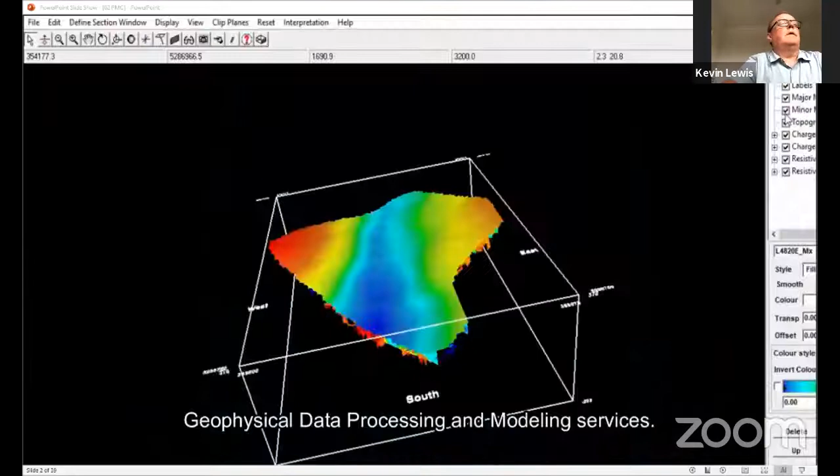Provide a wide range of geophysical and geotechnical services to environmental groundwater and engineering industries. Long-term experience in base metal exploration, porphyry gold, and copper exploration, geophysical data processing, and modeling services.

We have a wealth of international survey experience over the past 2 decades, across over 28 countries in some of the most remote and challenging environments.

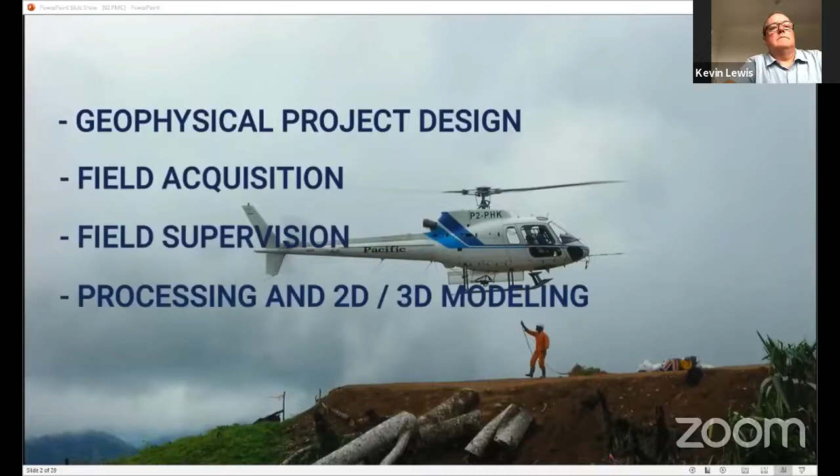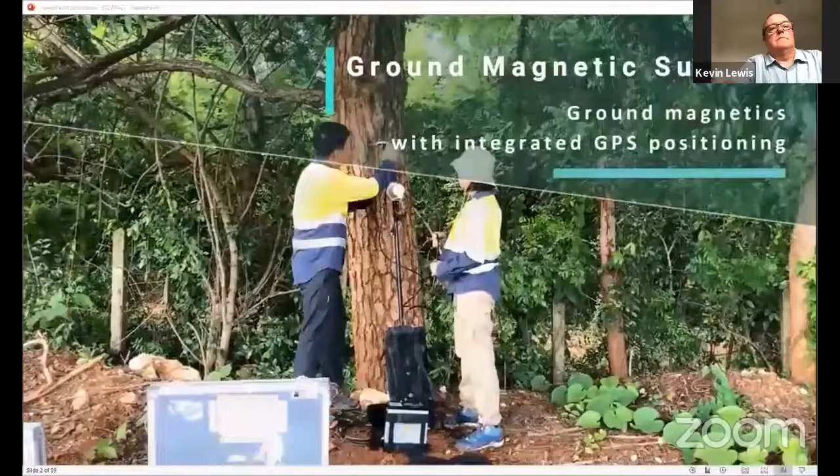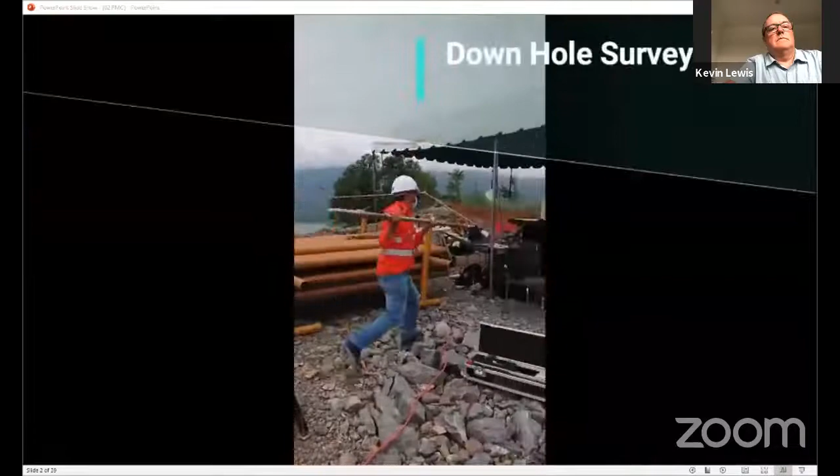Our services: geophysical project design, field acquisition, field supervision, processing and modeling, data interpretation, induced polarization surveys, transient electromagnetic surveys, ground magnetic surveys, unmanned aerial vehicle magnetic service, downhole surveys, radiometric surveys, resistivity surveys, seismic surveys.

Atty Geophysical Consultants.

The Philippine Mining Club and the Philippine Infrastructure and Construction Club are professional networking forums bringing industries together and creating opportunities for the Philippine mining and infrastructure and construction industries.

Networking is about giving, not taking. It is about forming trust and helping one another toward mutual goals, regularly engaging with your contacts, and finding opportunities to strengthen relationships.

Networking is a great opportunity to exchange best practice knowledge, learn about the business techniques of your peers, and stay abreast of the latest industry developments.

Opportunities like partnerships, invitations to events, introductions, and giving talks and presentations bring challenges that benefit and feed your career, professional development, and personal interests.

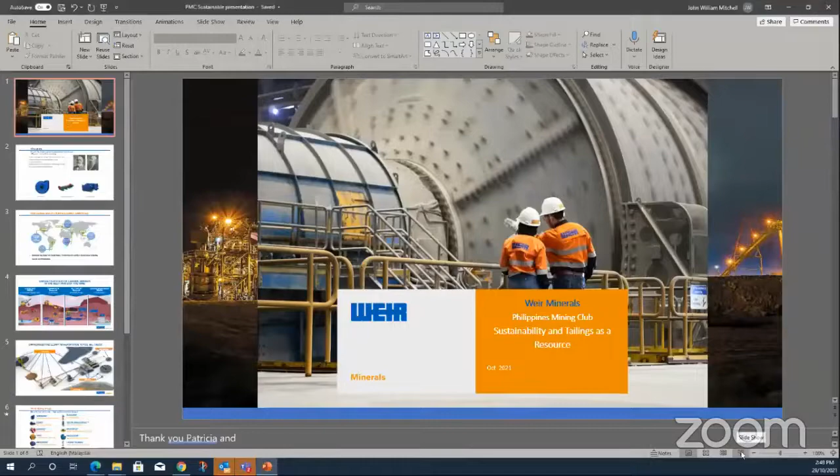So it's a great pleasure to be able to talk today to the Philippine Mining Club, and we'd like to thank you for this opportunity. Hopefully in 2022, we'll be able to do a bit more face-to-face when we get back to the new normal.

But today we're going to do just a very brief overview of Weir's vision of sustainability, and a little bit of explanation about Weir for those who are not 100% familiar with Weir. Then we'll move on to Nils' presentation. I will only take up about 10 or 12 minutes.

So who's Weir? I've been to many mining club luncheons around Asia, and as soon as they see Weir Minerals, sometimes people say, which mines do you operate in? Well, we like to say we operate in all of them.

So we have a division in minerals that focuses on mineral processing for engineering products, services and solutions. The two old chaps you see in the picture here are George and James Weir, who started the company 150 years ago to this year. We've actually been having celebratory functions this year, which has involved some of the royalty in the UK.

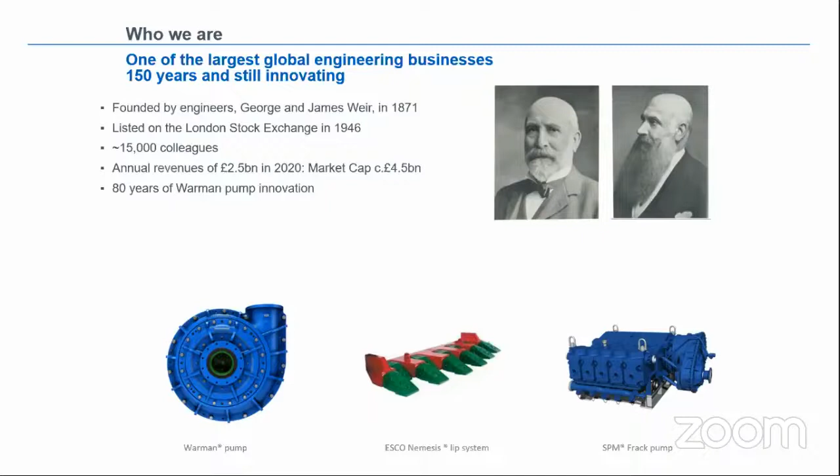So Weir is quite a global manufacturing and supply chain business. We have 15,000 staff spread right the way across the world. This enables us to get geographically close to our customers to provide that after-sales service. It also has been great, especially during this COVID time, giving us a great degree of supply chain flexibility.

In Asia, we operate out of our regional headquarters in Kuala Lumpur. And in the Philippines, we have a fairly large staff, led by Nico Satya, which includes our area support staff, our rebuild and our rubber lining teams.

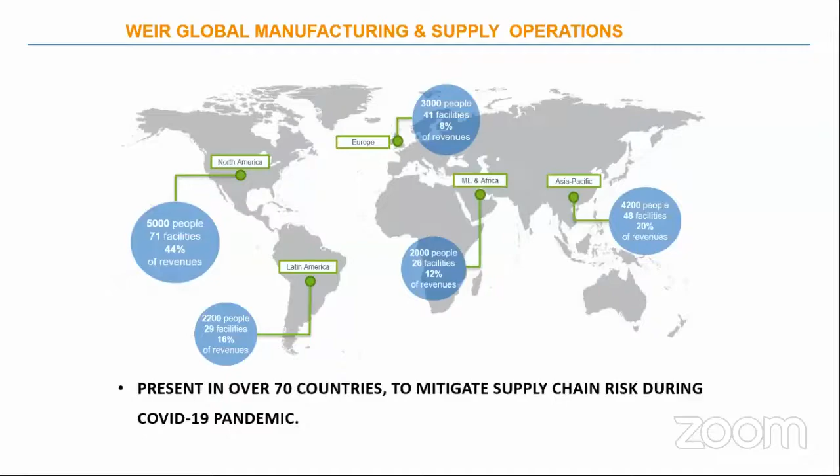So the Weir portfolio of products, with the acquisition of ESCO, gave us more of a footprint on the pure mining side of the business, where they are the #1 ground engaging tool manufacturer in the world. With comminution, our Enduron high pressure grinding rolls are #1 in the world.

The Warman slurry pump is by far the #1 used slurry pump globally. And of course, in tailings management, which Nils will be talking more about, we have our GEHO positive displacement pumps for pumping high density solids, concentrated slurry.

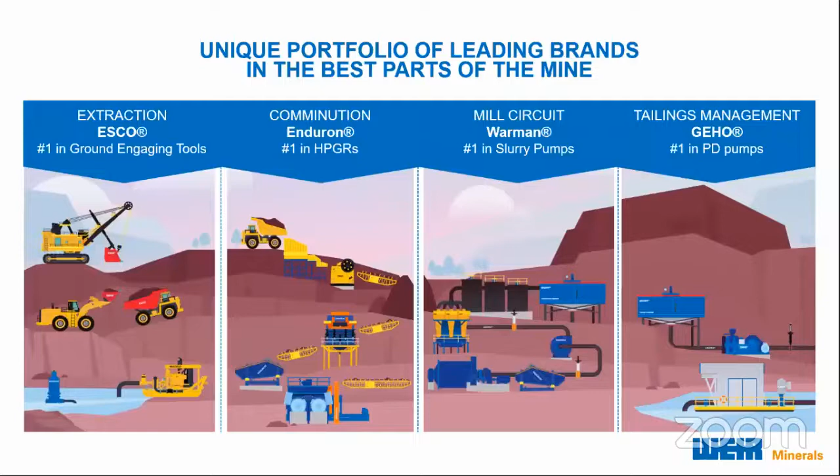This gives Weir an end-to-end solution for mineral processing plants, right from truck body linings through to tailings systems. With all the different technologies, we have a wide range of erosion and abrasion resistant materials that have been developed for each product. We're able to apply those to our existing customers for the benefit of alleviating pain points and wear points within their plant, not just purely within our pump, hydrocyclone or crusher products. So we're doing a lot more with piping and drop chutes, etc.

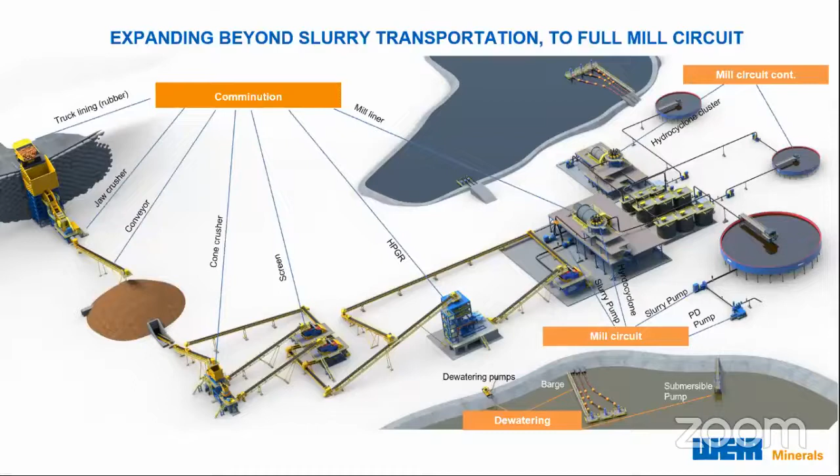Some of the brands under the Weir company portfolio will be very obvious and known to you, familiar brands like Linatex and Multiflo, and then a few other brands you may not have been familiar with in the past.

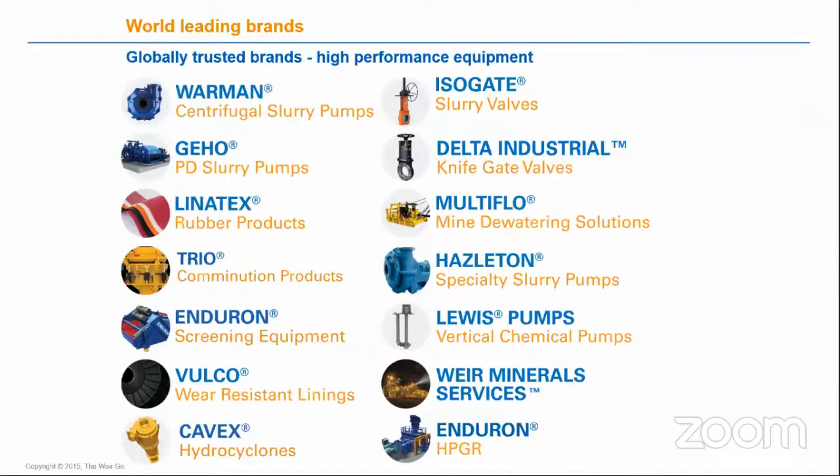So Weir's vision for sustainability - it's an opportune moment with the COP26 conference about to kick off in Glasgow, which is the home of Weir. In fact, we had a webinar last night from our CEO and the board, and sustainability is at the core of our business. There was a comment made recently by the US Special Envoy on the Environment, John Kerry, where he mentioned that governments can't do it alone, that private companies also have to get involved and contribute to sustainability.

So to sum it up, we strive to make our customers more sustainable and efficient, and of course sustainability and efficiency can also improve profitability. It's at the core of our purpose and the heart of what we do. At this point, I'd like Joe Paul to run a short video on our Weir vision for sustainability, which would be a better summary than anything else I could say.

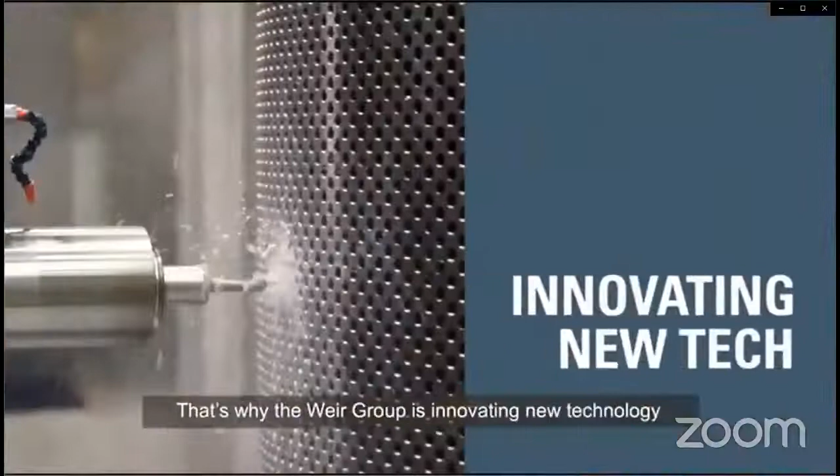Sustainability is a big challenge for all of us, and the world's primary industries need to be part of the solution. That's why the Weir Group is innovating new technology to enable the sustainable and efficient delivery of the natural resources essential to creating a better future for the world. Because many natural resources are finite, it's critical that we focus our innovation on helping our customers become more sustainable. We are engineering this transformation in the industries we work in.

Reducing the world's dependence on carbon requires more electrification and greater use of alternative energy supplies to power our vehicles, heat our homes, and reduce greenhouse gas emissions. Yet renewable technology usually requires metals, which are a non-renewable resource. That's why innovative technology is so important to this solution.

An electric vehicle uses four times as much copper as a traditional car, and Weir Group's technology helps process most of the world's copper. So you can see why a focus on making technology more efficient is critical in making mining more sustainable. We want to provide solutions to our customers that meaningfully reduce water and energy use and minimize waste.

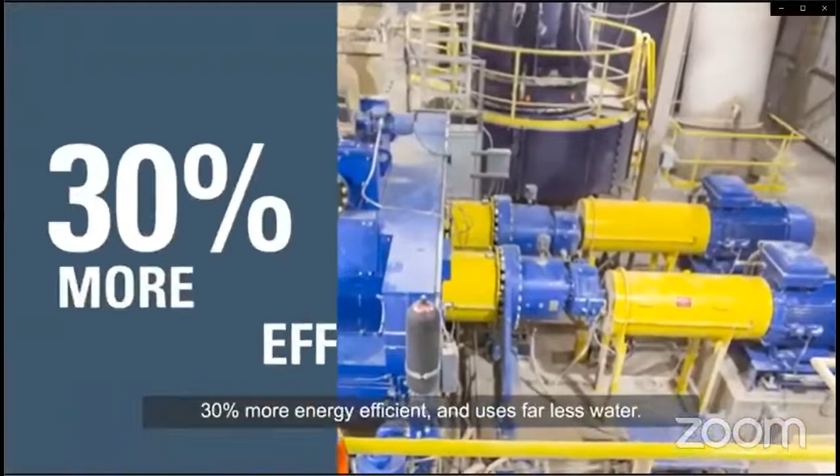Weir Group's Enduron high-pressure grinding roll is 30% more energy efficient and uses far less water. Our new TerraFlowing technology can turn tailings waste into a safer, usable resource. We're even working on solutions which will reduce truck journeys in mining by pumping ore from deep underground.

We strive to make our customers more sustainable. It's core to our purpose and at the heart of what we do. But to be credible, we have to make Weir more sustainable, and that's why we've signed up to a 50% reduction in our own CO2 emissions by 2030. And of course, sustainability is not just about the environment - it's about having a positive contribution in the communities and to other stakeholders all over the world.

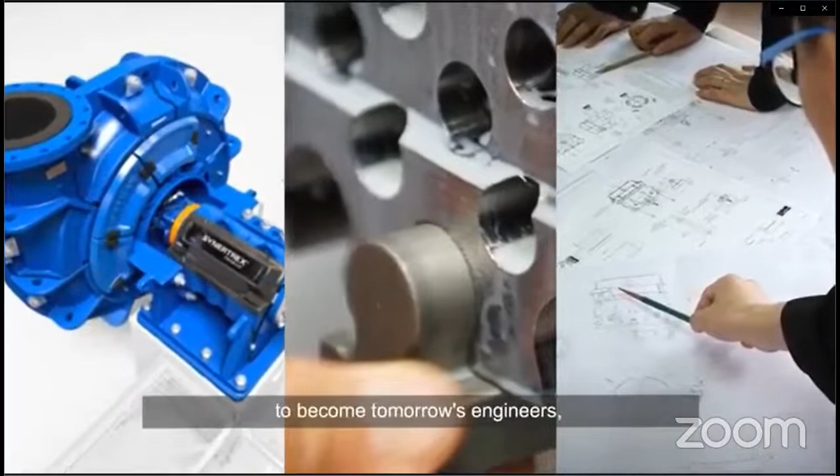That means prioritizing the safety and well-being of everyone who works with us. It means nurturing our unique culture to be the place that our people do the best work of their lives. It means inspiring people from all backgrounds to become tomorrow's engineers, creating the sustainable solutions that our world depends on. We have developed a holistic strategy for sustainability with targets that are ambitious and achievable. We're focused on where we can make the biggest difference. We share a single vision with our customers: making mining more sustainable.

And so at this point, I'd like to hand over to Nils Steward, who will continue with his presentation on tailings as a resource.

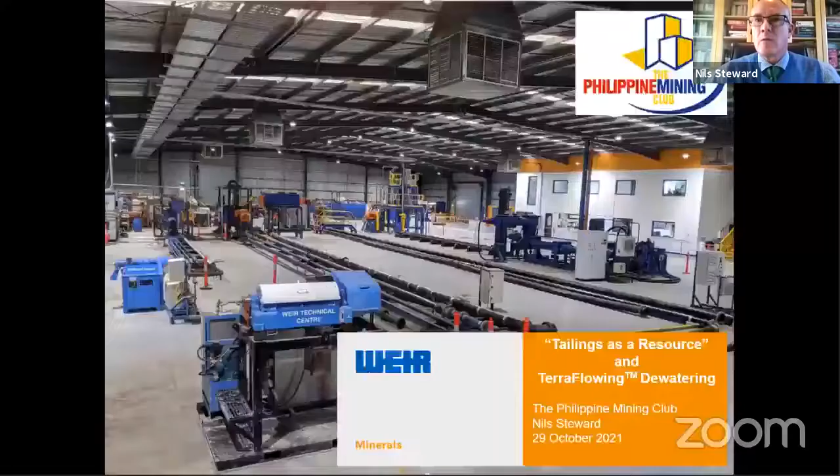You're on mute. Okay, there, sorry - I was having a problem with technology and trying to unmute myself, which I've now managed to succeed in doing.

And yes, Patricia, thank you very much for that introduction - made me feel very, very good about myself. And now I'd like to thank the Philippine Mining Club for entertaining us today. I hope that I'm going to present something that'll be stimulating and will bring forth a lot of discussion about the opportunities that exist within the mining world regarding tailings.

As a first slide, just to give you an idea of the magnitude of what we deal with in terms of tailings - tailings being the material that's left over after we've actually got the mineral we're after out of it. This picture gives you an idea of the scale for, say, a gold operation or any operation where you're getting 3 grams per ton of material out of your tailings mass. And once you've ground the tailings up, there's a bulking factor.

Based on the assumption of a 3 gram per ton value and a 1.6 kilograms per cubic meter volume of material left over, this is the size of the material, if you could imagine that as a cube. And this little red dot is what is actually the valuable product taken out.

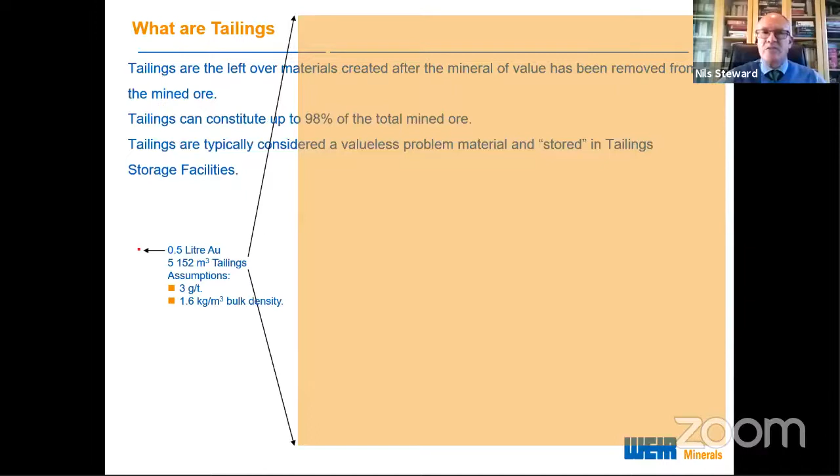So we can land up with this huge mass of tailings that needs to be stored. And if we don't store it, we need to be able to do something about it. And that's hopefully what we're going to look at unpacking today.

So tailings has increased with time. As you can see here, early 1900s, we were doing hundreds of tons per day. Now we're up to dealing with hundreds of thousands of tons of tailings per day. So there's been a significant increase in the amount of tailings produced.

And that is because grades have gone down. That's because demand has gone up. And so the challenges for us as miners is how do we store tailings safely for the period of time that is expected, which was sort of around 1,000 years, and we can now start to consider that we've got to do safe tailings storage design in perpetuity. Can we recycle tailings? Can we reuse tailings? Can we produce no tailings at all? And these are the challenges that we're going through in industry now.

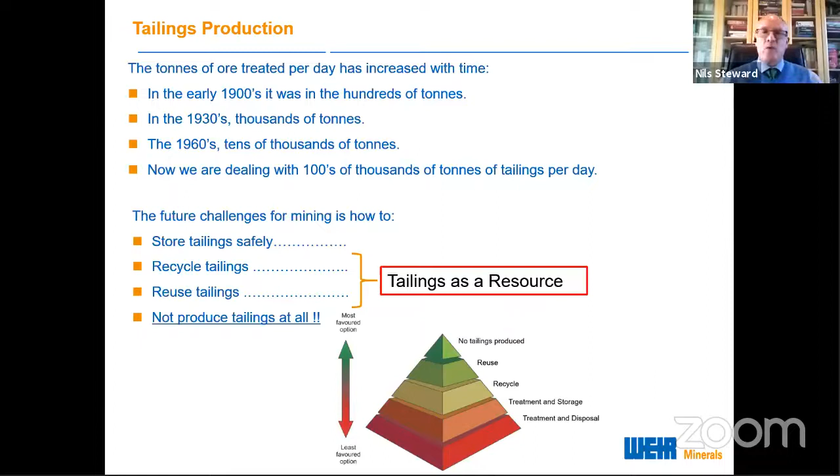So traditionally, we've had very much linear thought, and in many instances, we're still struggling to get out of that linear thought mold. And that really was, we mine the material, we crush it, we get the ore out, and we go and store the tailings in a traditional tailings dam.

And the linear thought on that is that what we're looking at is removing more water from it. So we're looking at removing more water to, number one, recover the water, and number two, to be able to have a more stable structure behind. But that is still doing the same thing.

We can reuse tailings. There is the opportunity to reuse tailings as backfill and put that back underground. And if we have a look at that and we're able to fill our entire mining operation, we can get about 60% of our tailings underground maximum. And you can see the size here, this tailings dam being 60% smaller than the other one. So there is a reuse opportunity.

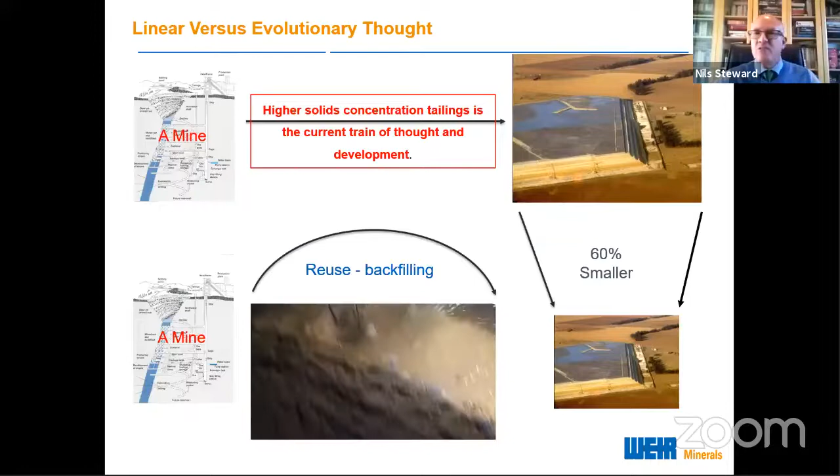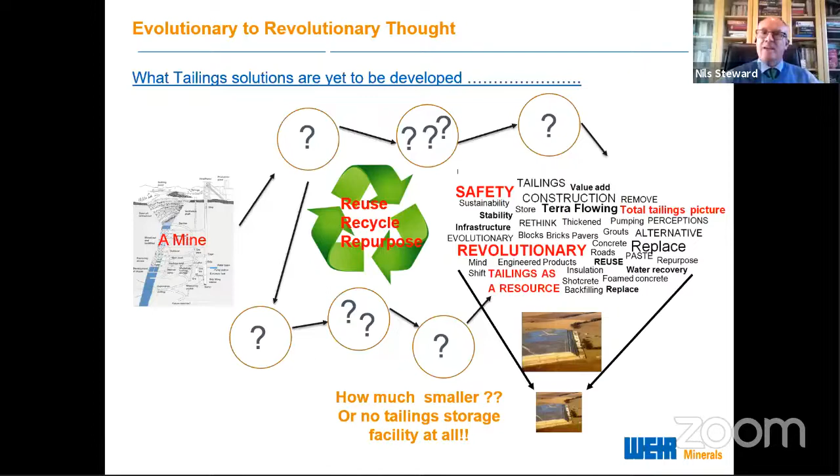In terms of moving to revolutionary thought as opposed to evolutionary thought, what is it that we can do to reuse, recycle, repurpose tailings? And how much smaller can we make that tailings dam, or actually just do away with that tailings? What have we not developed as of yet?

And this is where we come to this tailings as a resource concept. There's a lot of conversation about it. It certainly is something that's spoken about a lot, but it's not actually gaining traction to move.

There are many things that you can do with tailings already, whether that's building blocks, pavers, spraying shotcrete, whether it's casting it, or making it as a foamed product. Many of these products have been developed in the mining industry, most notably

Anglo Gold. I've been involved with that over the last 30 years with Anglo, when it was still Anglo American Gold and Uranium, to Anglo Gold Ashanti. Very innovative, looked at developing cementitious products out of mine tailings to put in their underground supportings.

Eldorado Gold, we'll have a look at some things that have been done there. And most recently, Vale has been producing a block with a tailings component.

Tailings have been used in South Africa extensively in the manufacture of clay bricks, with strengths ranging anywhere from 55 to 150 megapascals. I've shown you a small picture on the side here of work that we did, again, 25 years ago, on having a look at the kiln firing of tailings bricks, 80% plus tailings, that were then extruded in a traditional brick manufacturing method and fired at 1,100 to 1,180 degrees centigrade.

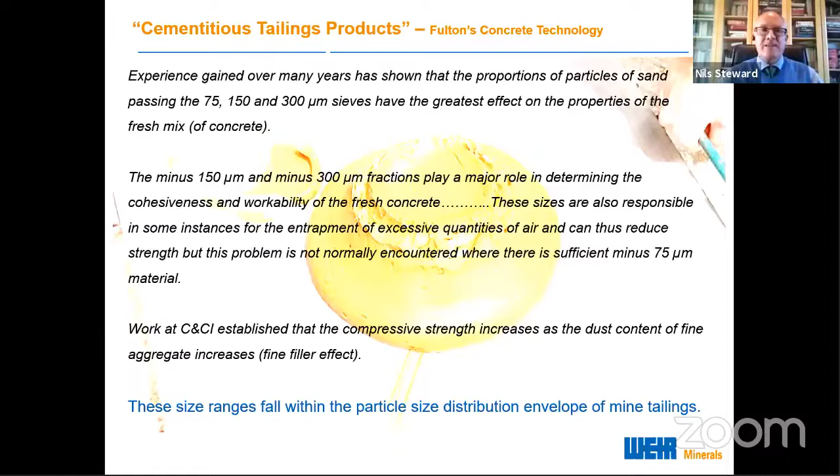If we now extrapolate this to the real world, ultra high performance concretes, also called reactive powder concretes, are becoming a very well established product. It's actually been sold for many years under the trade name Ductal by Lafarge, and it's a combination of cementitious materials and sands, those sands typically being 150 to 600 microns in size, and a filler between 5 and 25 microns in size. And this is well within our mine tailings regime.

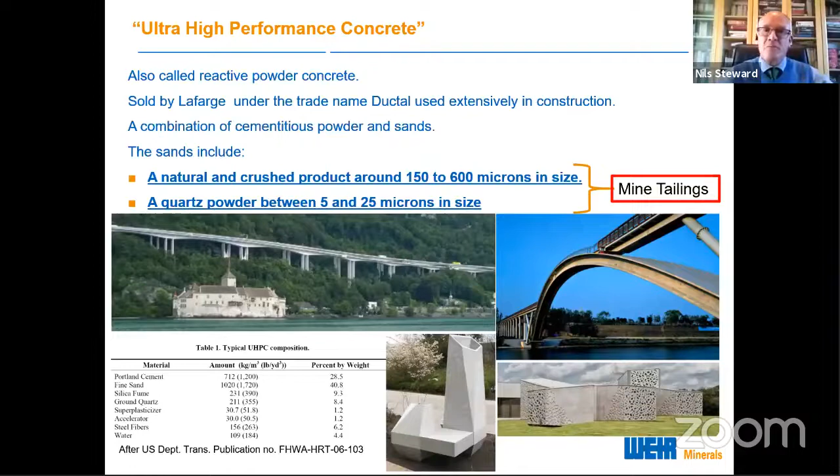So where are we with our typical tailings particle size distribution envelopes? Keep in mind that we're looking at 100% below 600 microns. We're looking at D50s of 50 to 100 microns, sorry, D75s and D50s of 15 to 40 microns. So it's particularly fine. What I've done is put together an envelope here of materials that we've worked with, from gold, nickel, copper, typical tailings, and their particle size distributions. We'll be only investigating these size distributions. We have done work with iron ores, and we'll talk about that later.

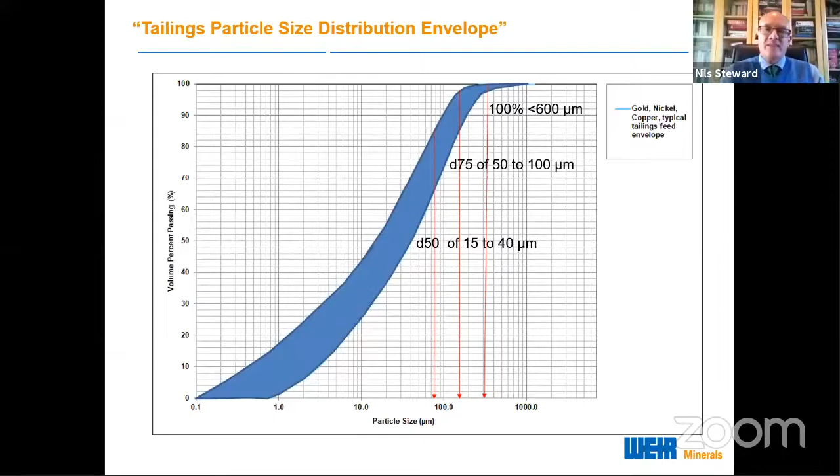So, tailings as a resource, what can we actually do now? We can actually produce a large number of products, but there needs to be a requirement, and there needs to be a market, and it needs to be accessible. This perhaps has been part of what has held us back. Each site is different with its opportunities, and no one model fits all sites.

But we're able to make fired products, as we've discussed. We can make basically clay bricks out of tailings. We can recover minerals that can be used in other resources, so we leave behind silver, we leave behind magnetite. We can actually build tailings dam structures, so the actual sand structure that contains the tailings can be built out of the tailings itself.

And this is done extensively throughout South America. We can manufacture backfill from it, paste backfill, a high density, high solids concentration cemented product. We can produce hydraulic fill from it, which is a product that dewaters. And there is obviously the concretes, concrete products, bricks, pavers, etc. Sprayed concrete, which we know as gunite or shotcrete, used extensively underground for underground support. We can make ultra high strength concrete, as we've already seen. Lafarge has got their product Ductal, and we can look at cellular concretes, or those foamed concretes. Now, it's easy to talk about it, but what's actually being done?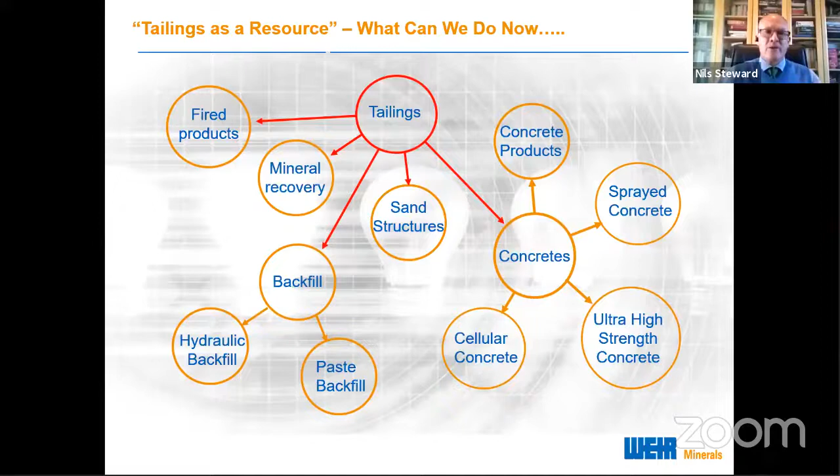So if we have a look at this particular product, it's my personal favorite. This is a product that was produced out of mine tailings for the AngloGold drill and fill mining technique in South Africa, where what they did is they drilled out the gold reef. So they would drill a hole between 500 and 900 millimeters in diameter at a dip of around 20 degrees and over 30 meters. So you would remove that rock, basically just taking out the gold channel.

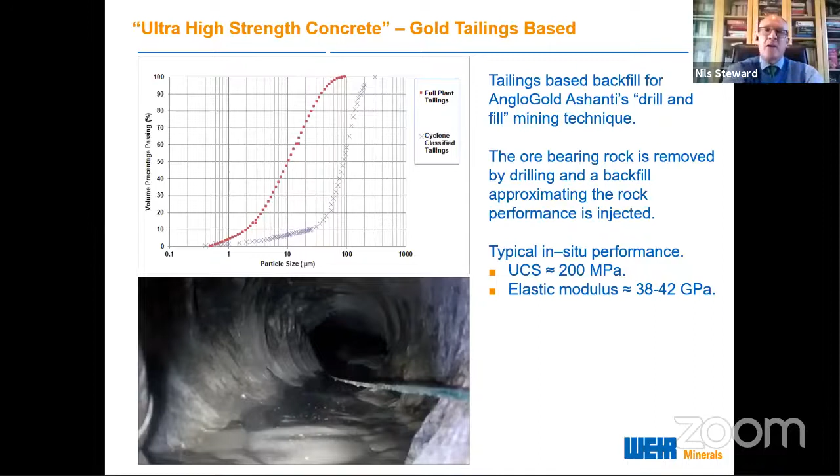And what they wanted to do was replace that with essentially rock. So they wanted a cement product that gave around 200 MPa UCS, uniaxial compressive strength, and an elastic modulus of 38 to 42 GPa. We actually achieved this with their tailings from the mine, and we transported this product in two components, one through a pipeline 3,500 meters underground. We took the cement down separately. We combined the components underground and pumped these with positive displacement pumps over another 1,000 meters.

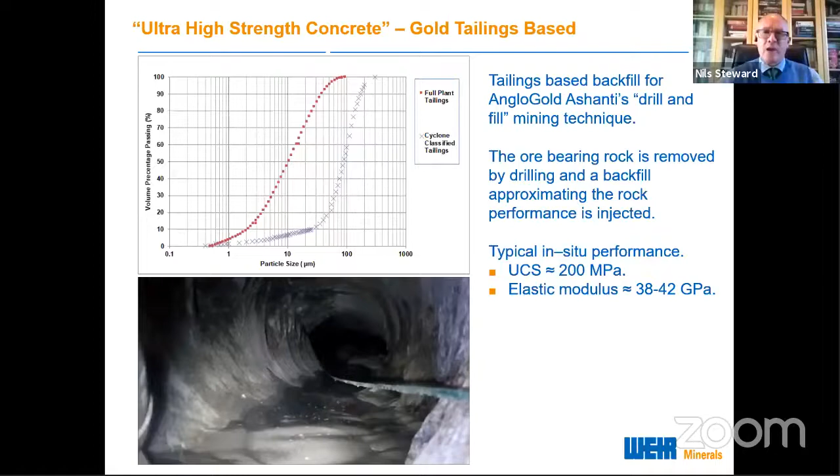Now, this product is actually 85 weight percent solids. Amongst its characteristics is it's self-leveling. And we've got a competition at the moment going on at the WTC, where our staff are actually looking at manufacturing the highest strength concrete that they can manufacture. At the moment, the work is running at 95 megapascals within 48 hours.

And these are from gentlemen who have no cement technology background and are following what they can actually find through the literature. We'll see who wins this competition by the end of November.

The other product is sprayed concrete. We've done this on various gold mines, both on surface and underground, and it's 100% tailings—there's no aggregate in this. What's very interesting with this wet shotcrete is that it has very low rebound, as you can see here, and compressive strength between 25 and 55 MPa can easily be achieved. Energy absorption can be anything up to 1,800 joules, depending on the type of fiber used. We tended to use polyfiber. An EFNARC result, or French panel result as some call it, is about 2.5 to 3 times the energy absorption you'd get with an Australian round determinate panel.

You do have to use accelerator with this. Again, we've replaced the sand with tailings, and we're able to achieve up to 40% savings in cost to the mine by utilizing their own tailings.

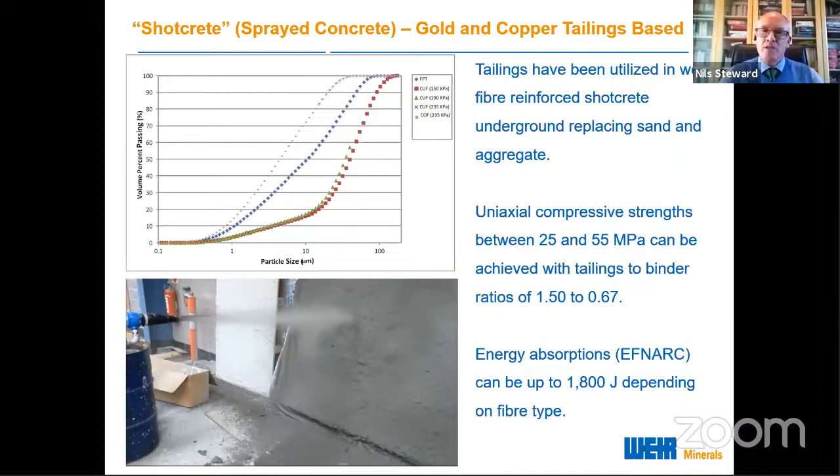Here's one that's relatively simple to achieve. This is a road that was cast on a mine site for a mine. This road washed away every year with the heavy rains, and that water, together with mud from the mountainside, would wash into the tailings dam, which obviously didn't lend to stability. These pictures are of the road after 4 years—it's now been there for almost 6 years. You can see the slipway that was built to take the water around the tailings dam, so the tailings dam no longer saw the water. So the concrete road manufactured from tailings served two purposes: it stabilized the tailings dam, and it provided a constant roadway through the wet season.

The wear characteristics of this product were superior to the equivalent 25 MPa aggregate-based concrete. A lot of this had to do with how, as the aggregate-based concrete wore, the aggregates would pop out of the concrete. With the tailings-based concrete, the aggregates are less than 300 microns in size, so you don't get that great loss, or the pit forming where further corrosion or erosion can take place. Flexural strengths were very similar, and shrinkage was very similar to the aggregate-based concretes.

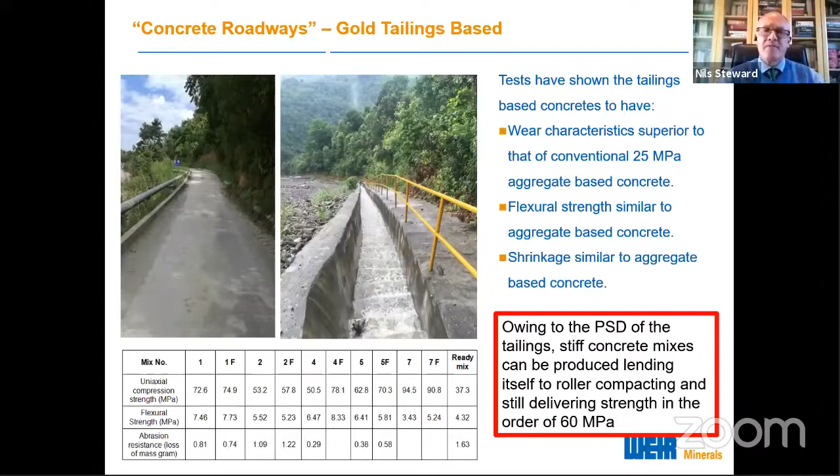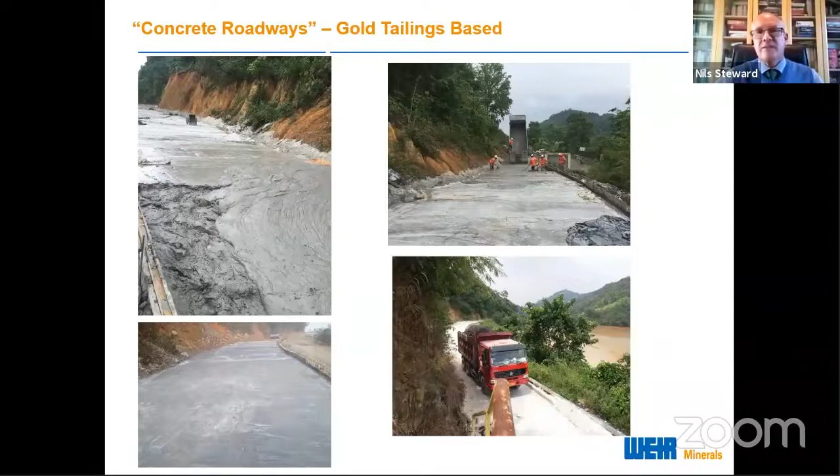I put another slide in here of exactly this roadway because it's quite interesting—it's low-hanging fruit and really delivers an impact about what can be done. This roadway was essentially cast with tipper trucks. The tailings and cement were manufactured in the shotcrete plant that this mine had, delivered by tipper truck, pushed out with rakes by men, and then floated using traditional methods with long planks to float the material back. This gives an idea of the trucks that were trafficked over this road during its operation, and you can see the tailings dam in the background—I added that to give a better idea of the construction.

In terms of cellular concrete, again one of the tasks we were set was to produce a barrier to fire underground. Typically, concrete foam blocks were carried underground and used to block off various haulages. We were able to manufacture a sprayed cellular product—just tailings, surfactant, and cementitious binders. We sprayed it through a nozzle with accelerator at the end, directly onto vertical surfaces. It could be used as walls, insulation, or blocks, and we achieved strengths up to 5 MPa.

This sample indicates how cellular it is and how lightweight we can make it. That block floated in a bucket of water for 4 years, and I'm sorry that I actually threw it away—it would have been good to still have around today to show the stability of the product.

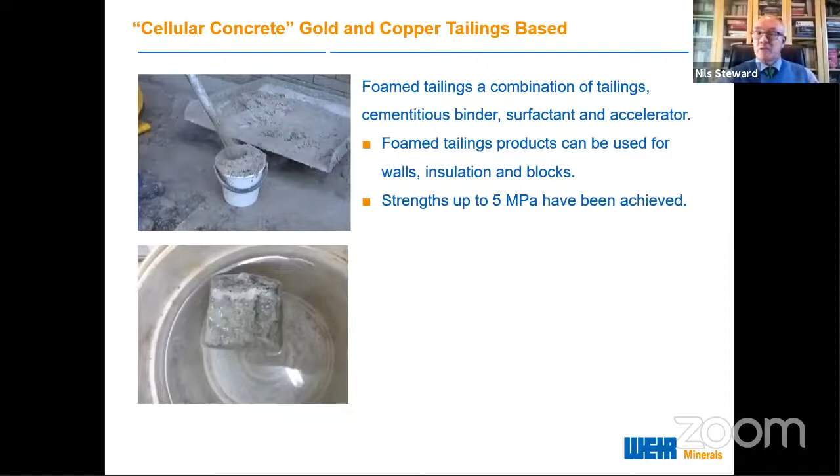In terms of copper and platinum tailings-based strengths, we've got two products. This one is a local Australian copper-based concrete, and this is a range of products manufactured from platinum tailings. We're able to vary the strength exactly as with typical cement technology, the cement type, rate of addition, and the superplasticizers used, which are the real change that has taken place in the mining, cement and concrete industry.

Ductile behavior is possible through superplasticizers. The strengths we've achieved with flowable concretes underground, giving 200 MPa and self-leveling, were only achieved through superplasticizers. The water cement ratio again varies the strength - the lower we get the water cement ratio, typically the higher the strength.

Tailings particle size distribution is very important. In many instances we need to blend the cements and the hydraulic and latently hydraulic binders so we can get the best packing to give us that strength. As with any cement technology, trial mix designs to prove the product are the way to go.

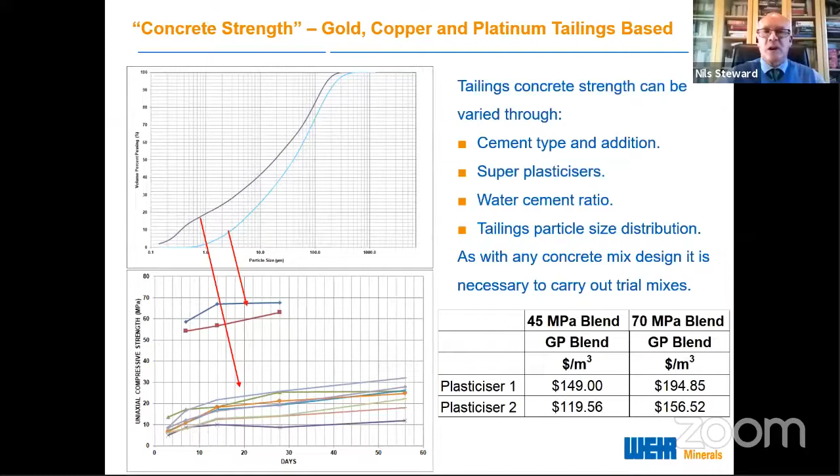In every instance I've put the particle size distribution up for you to note. So what's the problem? When we look at tailings, we view it as a single volume, a single particle size distribution - an overwhelming, unusable mass of material that we have to store and look after in a safe, sustainable manner for in excess of 1,000 years. We don't see the opportunities because we just see this huge mass of tailings - we cannot see the trees for the forest.

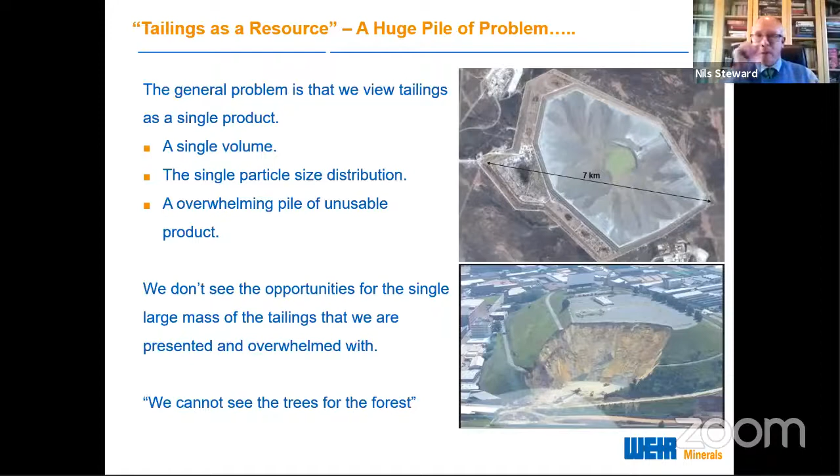So what is possible? You've seen a lot of things are possible. If we view tailings as a range of particle size distributions, not just a single one, we start to see the trees. If we separate out a coarse fraction, less than 600 microns, and use that in cementitious components, we can pull out 60% of the material and make cementitious components out of it.

But again, market and location - we've got to see what can be done. If we have an intermediate size range, less than 300 microns, a D50 of 17 microns, that constitutes about 20% of the tailings and is ideal for constructing construction boards. Gypsum is not dissimilar to tailings in terms of particle size distribution, and what we've managed to achieve with fine tailings is not dissimilar to what's achieved with gypsum board.

So we're able to start saying maybe we can manufacture a board out of fine tailings. It'll certainly have fire resistance and insulation capacities. What about a fine fraction, 100% less than 30 microns?

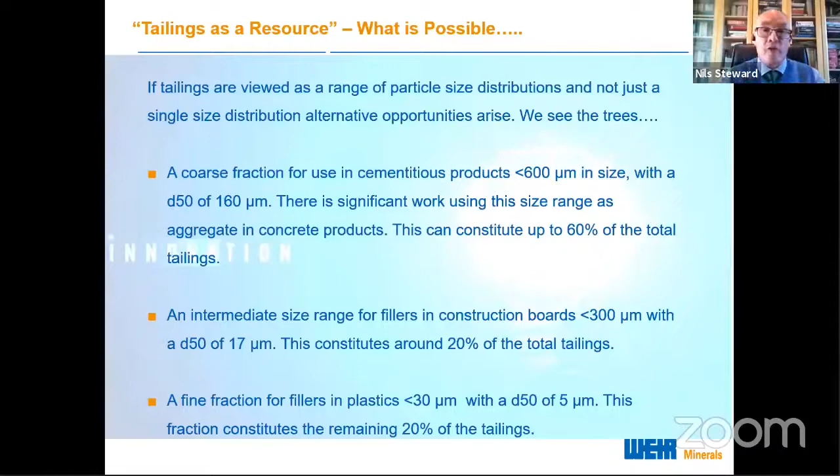Very interestingly, there are products out there manufactured today - papers and packaging - that are actually manufactured not from tailings but from ground rock. Whilst it may be a very particular ground rock used to achieve a particular paper quality, that doesn't mean we couldn't use our tailings to do that. We could manufacture packaging - anybody who buys a television set, a video player, or a set of headphones these days finds the packet this size and the headphones this size. There's a lot of packaging and a lot of paper in these things.

So that brings us to: is there a tailings as a resource solution?

Is there something that can lend itself to circularity? Is there something that can lend itself to being able to reuse all the tailings? This is the crux: recycling and reusing. There are some systems that can be thought of as low-hanging fruit in terms of our mining.

We can look at safe storage, and we're looking at that in terms of dewatering opportunities. They have environmental benefits, we get water recovery, and we have to have a stable structure.

There are other opportunities in terms of, depending on where your operation is, can we actually transport the tailings to the coast? Is there a need to transport the tailings to the coast? Can we recover energy while we're doing that?

Is there products within the tailings that we could recover through in situ leaching? If we're going to transport the tailings from site to another place to do something with it, can we put in the enzymes that are going to leach that material out? And when it's transported 20, 30, 40, 100 kilometers, can we recover the leachate and those other products?

Are there alternative minerals? I had a discussion not yesterday, the day before, with a gentleman whose mine happens to have an overwhelming amount of magnesite within their tailings. Calcined, dead burnt, is actually a very stable cement that produces very high strength in a very short period of time. But you need to get the necessary people together to get it from the one place to the other place to the market.

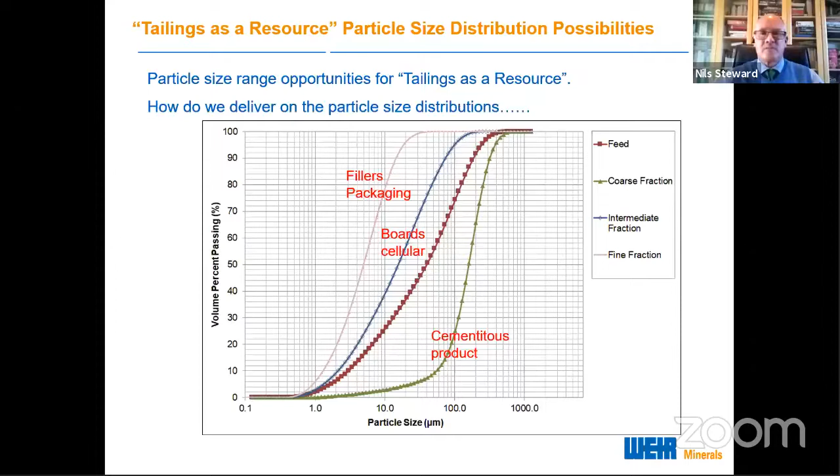And this is where I move to Terraflowing, the dewatering process that's being developed within the Weir Technical Center of Weir Minerals, and is still in its embryonic stage. We have gone a long way down the road in that, and I will actually show you a pilot facility that we're starting to operate.

But it's a flexible dewatering process that makes tailings as a resource possible. Not only tailings as a resource, but if you're looking to produce a stable product for storage, you can do that as well. Essentially, we have three stages.

The first being a primary cycloning stage, where we then take the overflow from that to a secondary cycloning stage. And the secondary cycloning overflow is taken to the final cleaning and dewatering of what is a very fine product. And that can be through centrifugation, or it can be through any other methodology.

If you are a brownfields operation, you may wish to use your existing thickeners to do that. But we land up with three product streams. The initial product stream, we can modify that initially straight for the manufacture of a tailings dam embankment, and take the following two streams, combine them, and dispose of them as a stable, thickened tailings within that.

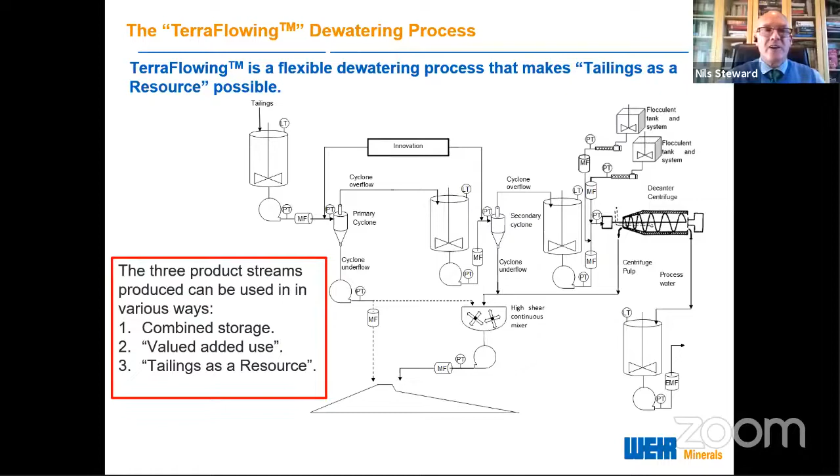In terms of particle size distributions, these are the envelopes of the products that we've dealt with. We've dealt with gold, copper, nickel, which basically forms the blue envelope. We've dealt with iron ores from a number of operations, which basically fills in the green envelope. So everything that we have evaluated falls within these envelopes, and all the work that we've done, of which I'll give a brief overview now, has actually been for dewatering purposes. We have not gone further than just looking at producing the higher solids concentrations that are pumpable.

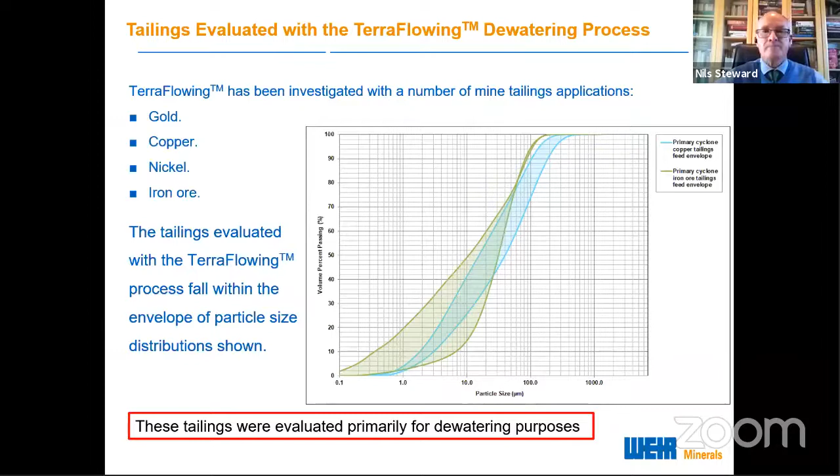So when we have a look at our primary cycloning, we started off in our test facility. We have a fully instrumented cyclone test rig at the Weir Technical Center. We measure mass split in real time, and we're able to fit different cyclones into it. The test facility is fully instrumented to measure everything in terms of flow rates, pressures, etc. And all our equipment is on variable frequency drive, so we can also vary the flow rate.

I need to state quite clearly that these cyclones are not operated in the manner that you traditionally operate cyclones, as you'll see as we go through. With our primary cycloning, we're able to achieve an underflow solids concentration from the cyclone of between 73 and 80 weight percent, depending on the particle size distribution we're trying to achieve. And we get between 40 and 60% recovery of the total tailings in the underflow.

Depending on what we're trying to achieve, we can get particle size distributions anywhere from 15 to 35% passing 75 microns. The reason I mentioned the particle size distributions is that when you're constructing a tailing storage facility embankment, the train of thought currently is that you want to have an underflow particle size distribution of 20% less than 75 microns. This is only a guideline.

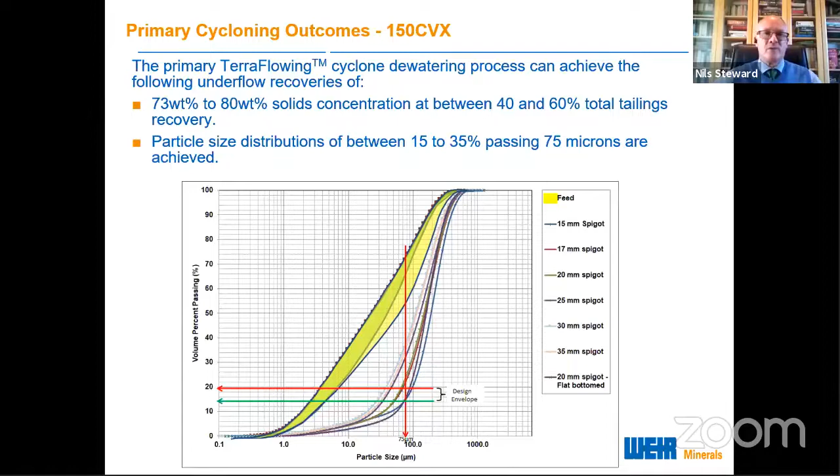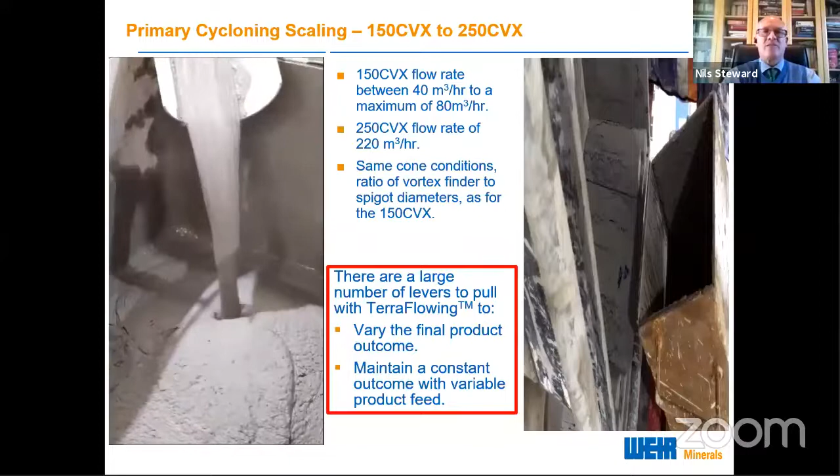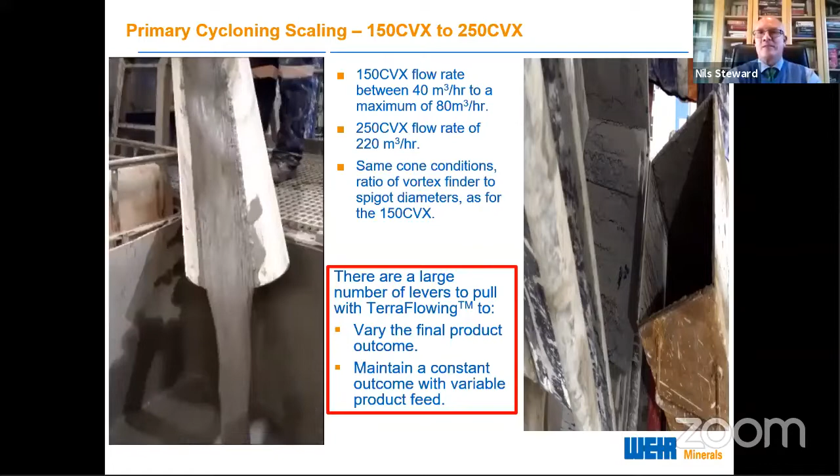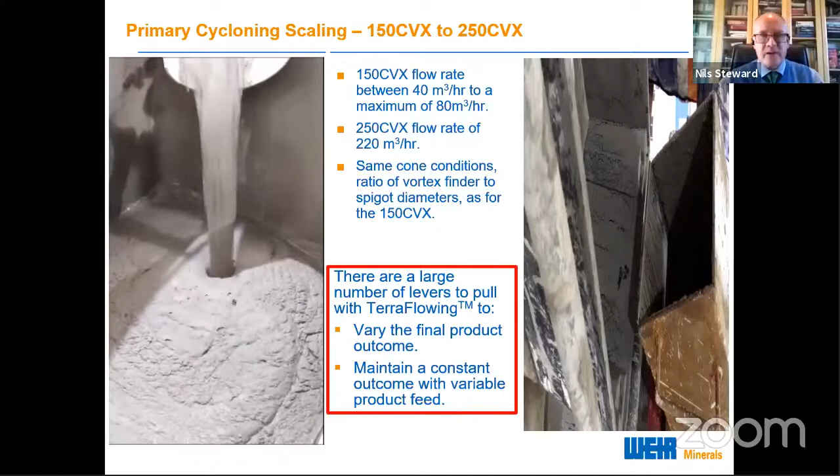Now, the problem, obviously, with the test work in a 150 millimeter cyclone is that we're only getting around 40 cubic meters to 80 cubic meters per hour through this. So if we were going to build a facility to deal with 10,000 cubic meters an hour, we'd have fields of cyclones. So what we've been doing over the period of time we've been developing this is having a look at scaling to larger cyclones.

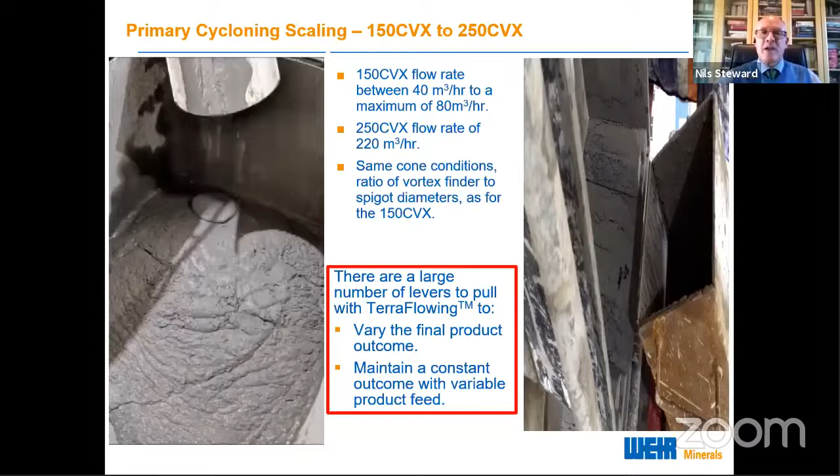And we have scaled this to a 250 millimeter cyclone with a flow rate through it of 220 cubic meters per hour. And this gives you an idea. We have achieved exactly the same underflow conditions of concentration and particle size distribution by matching cone ratios, which is the ratio of the vortex finder to the spigot.

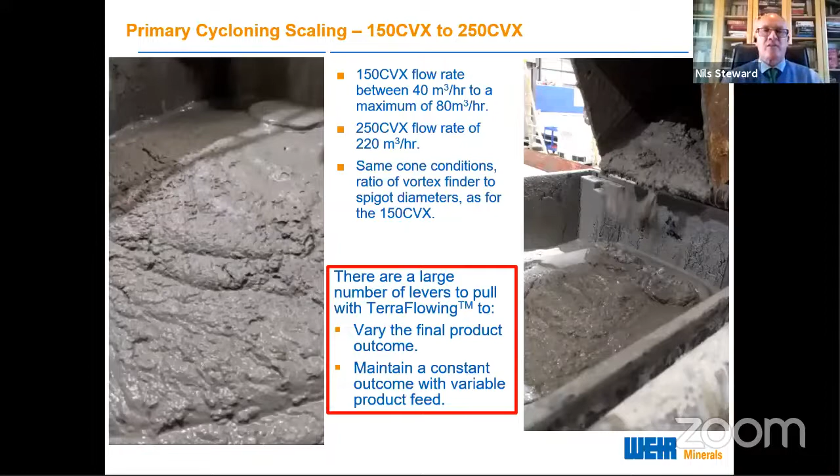So we have a huge number of levers that we can pull with Terraflowing in our primary cyclone to vary the product outcome or maintain a constant product outcome from a variable feed, because we have all these levers to pull.

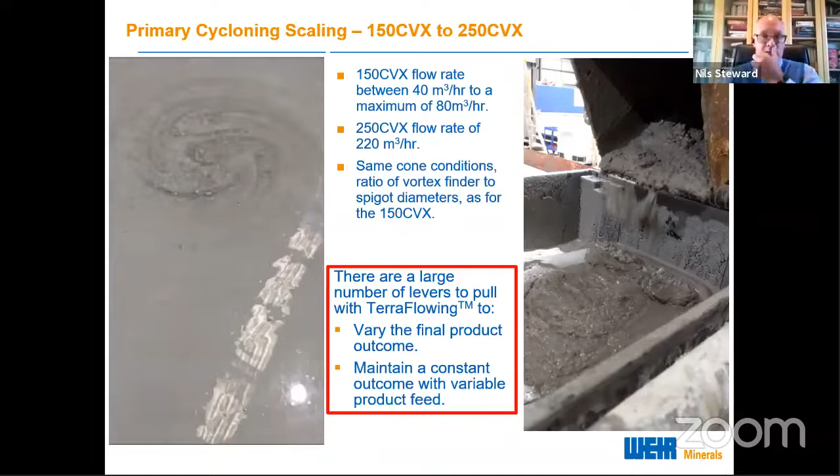Just bear with me a moment, my computer's just catching up with me.

So if we go to the primary cyclone overflow, we obviously now have a dilute product, and we need to thicken that and recover those tailings.

The first work we started with was with a 100 Cavex cyclone, and this gives you an idea of the underflow solids concentration. Again, owing to the method that we operate the cyclone and what we inject into the cyclone, we were able to achieve up to 74 weight% solids concentration at 40% total tailings recovery.

One interesting point is that if we take the secondary cyclone underflow at 74 weight% solids, and we take the primary cyclone underflow at 80 weight% solids, we start to deliver a flowable product at around 76 weight% solids. Now that is what is used for paste backfilling, and we haven't used any vacuum filtration equipment.

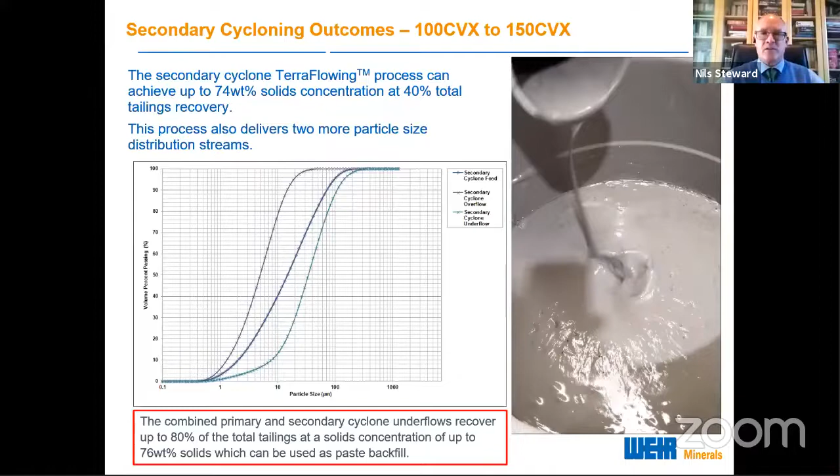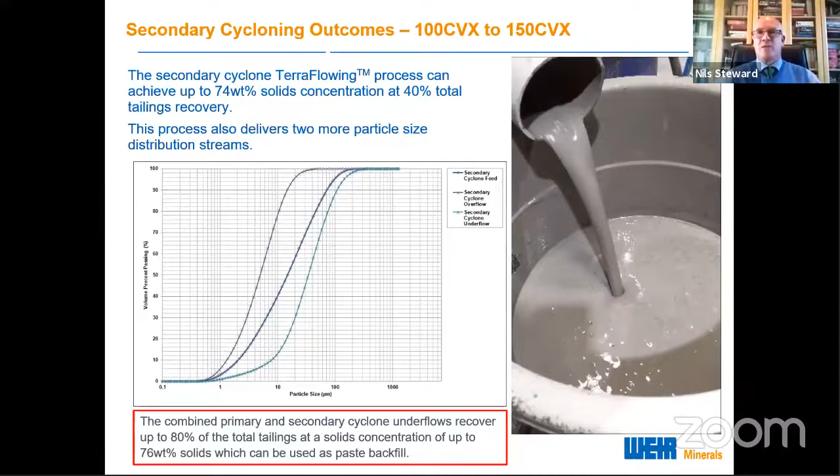So we're able to produce a paste backfill without a vacuum filter or vacuum filter belt in sight. Bear with me, just having slides catching up here.

We now have this very fine secondary cyclone overflow. It's dilute, there's a lot of water. We have a methodology of being able to pull out around 45 to 65% of the residual water before we put the product into the centrifuge. So we're able to reduce the volume of material going into the centrifuge and thus reduce the number of centrifuges and power draw that would otherwise be necessary.

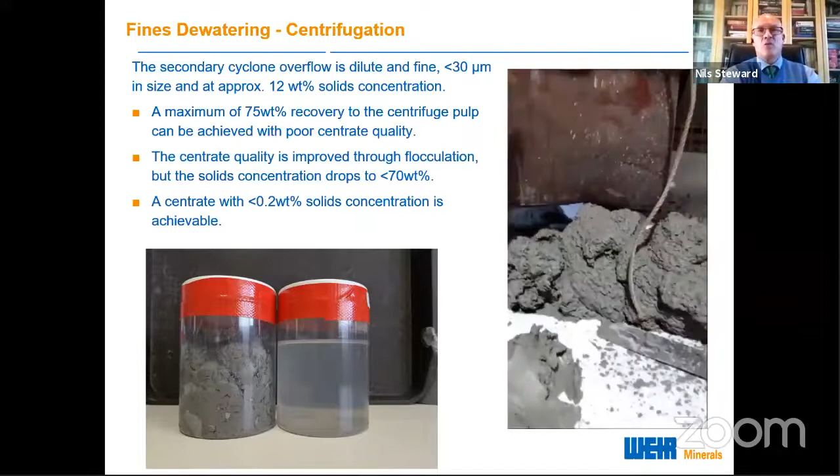So what you see coming out here is a centrifuge pulp in the order of 60-65 weight% solids. We get incredibly good centrate quality as our water.

You can see from the jar here, that is typically what our centrate looks like, and you've seen what the actual pulp itself looks like. We get around 0.2% weight% solids concentration in the centrate, which then means that that water can go straight back to a metallurgical process.

If we flocculate the process, we get the 65. If we don't flocculate it, we actually get a higher solids concentration in the pulp, but we also get a higher solids concentration in the centrate as well.

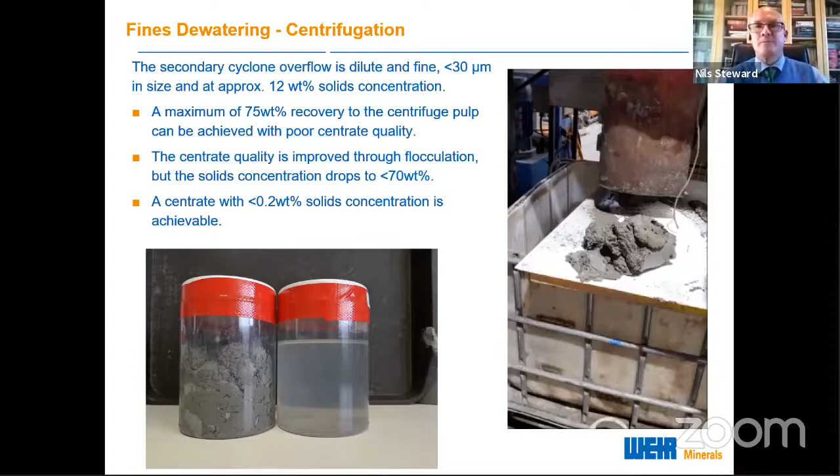So now we've actually got our 3 particle size distributions. We've got them in forms that we're able to deal with immediately, whether we're manufacturing cements, whether we're manufacturing fillers, whether we're going to foam them.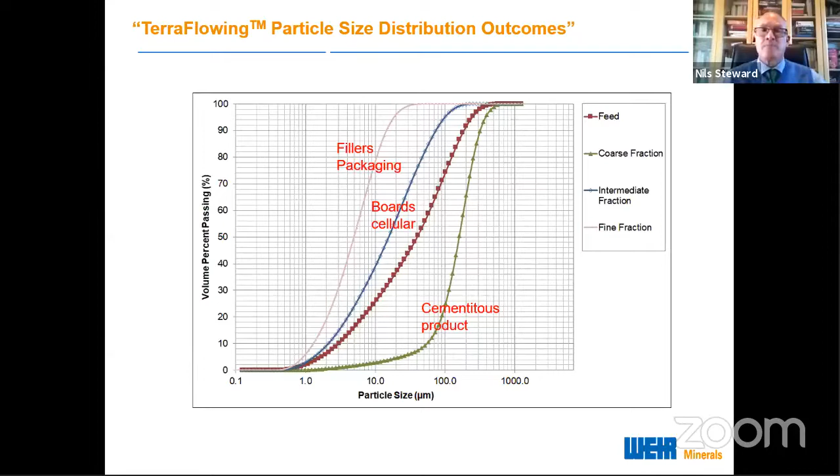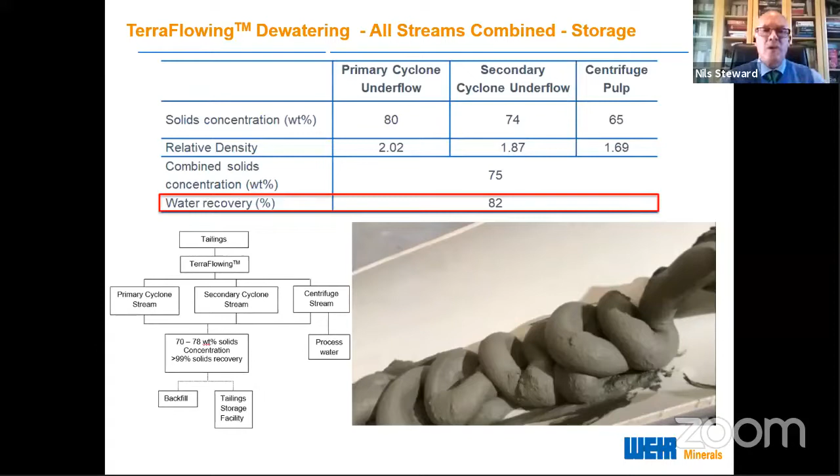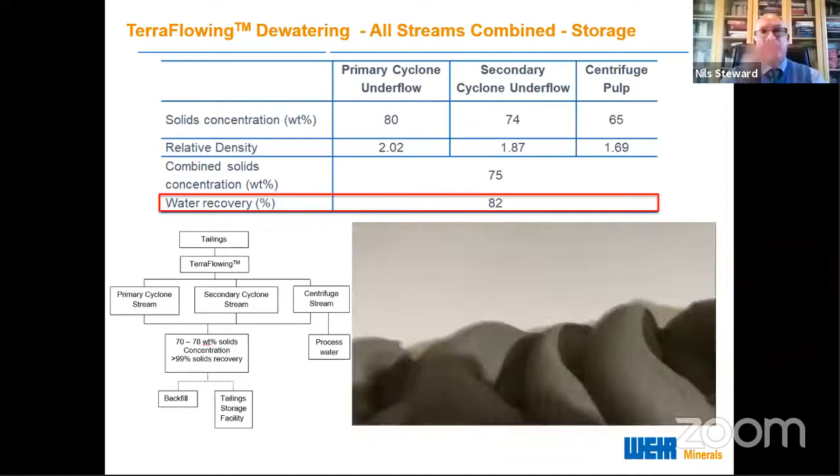If we continue just looking at this as a mine storage opportunity, what we can do is take all 3 of those underflow streams, the primary cyclone, the secondary cyclone, and the centrifuge pulp, and we can combine those. If we combine those, we recover around 82% of the total water in the tailings, assuming that the tailings came out of the met plant at around 38 weight% solids.

So what we're producing by combining all 3 of them is a very stackable product. We're able to produce that at anywhere from 70 to 78 weight% solids.

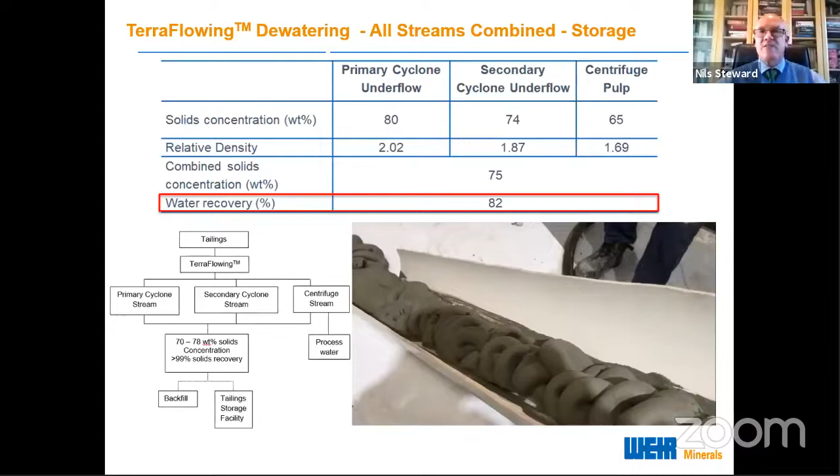If we alternatively take out the primary cyclone stream and use that to manufacture a tailings dam embankment, which we're trialing at the moment, we make the assumption we've taken out the primary underflow, boof, it's gone - we're using it to build the tailings dam embankment.

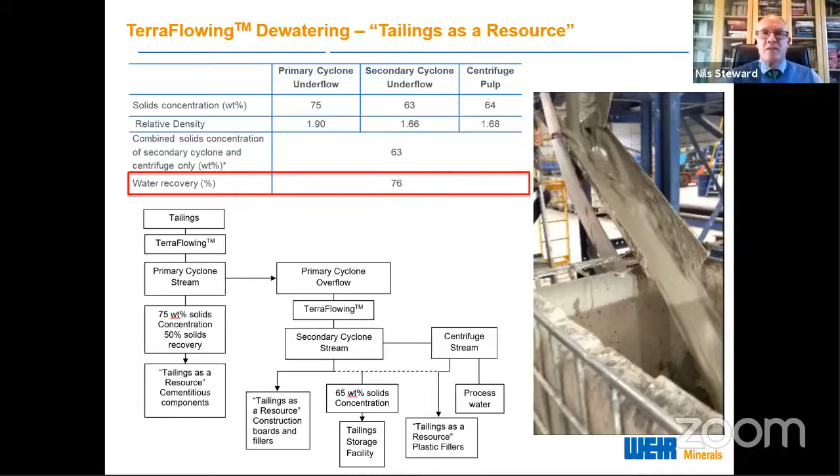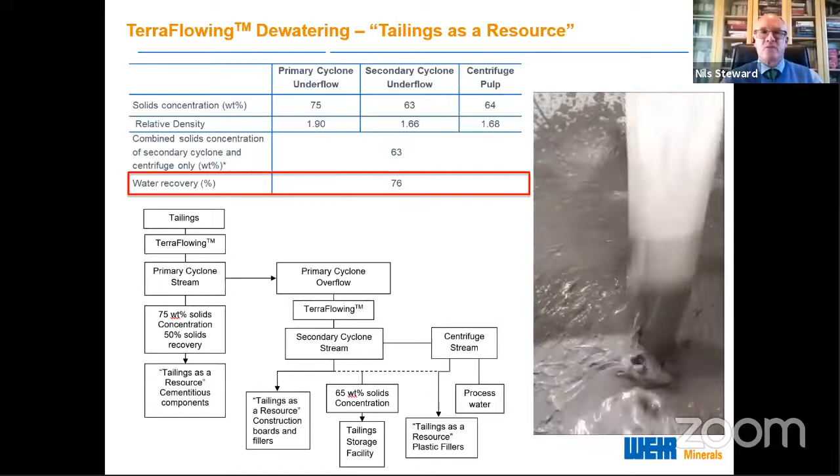What we now do is we take the secondary cyclone underflow and combine it with the centrifuge pulp, and we get a product that has got this kind of fluidity. That is around 63 weight% solids. It's pumpable with a centrifugal pump. So we can take this stream and store it within the tailings embankment that we have constructed out of the primary cyclone underflow.

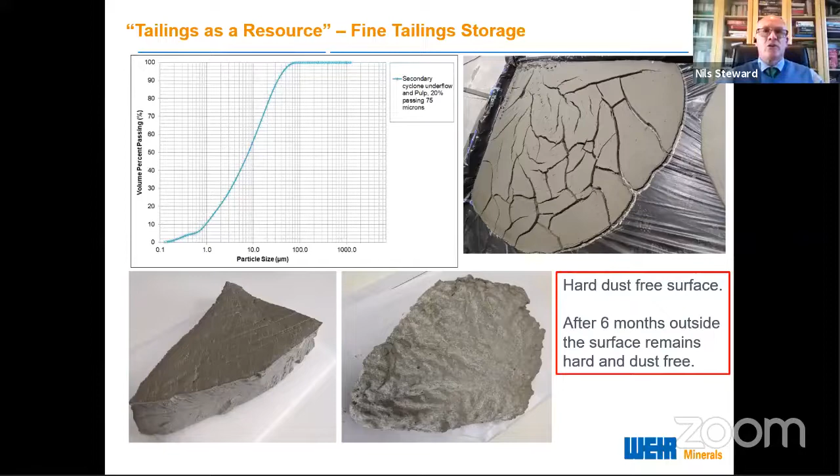So depending on the distance, that would determine whether you would require a centrifugal pump or positive displacement pump. So all of these products that we're producing through this TerraFlowing process for mine sites can be pumped with some form of Weir pumping system.

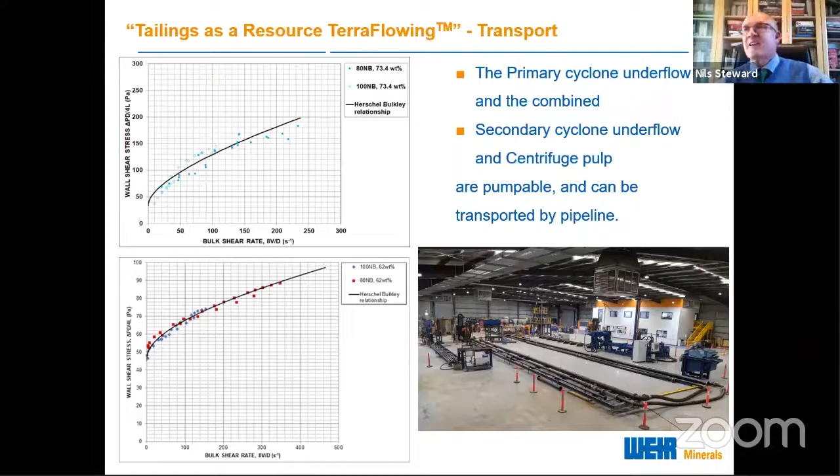To achieve successful tailings dam embankment construction, one has to do the test and trial work, and this test and trial work is underway. The objective is to deliver the correct particle size distribution onto this dewatering pad that has been constructed specifically for it.

We want less than 20% passing 75 microns. We want to compact this, and you can see there are areas that have been compacted. We want to get samples to ensure it meets the necessary particle size distribution, permeability, and compaction. We want a good concentration underflow so we have less water recovery to reticulate back, and we want a good number of solids out there.

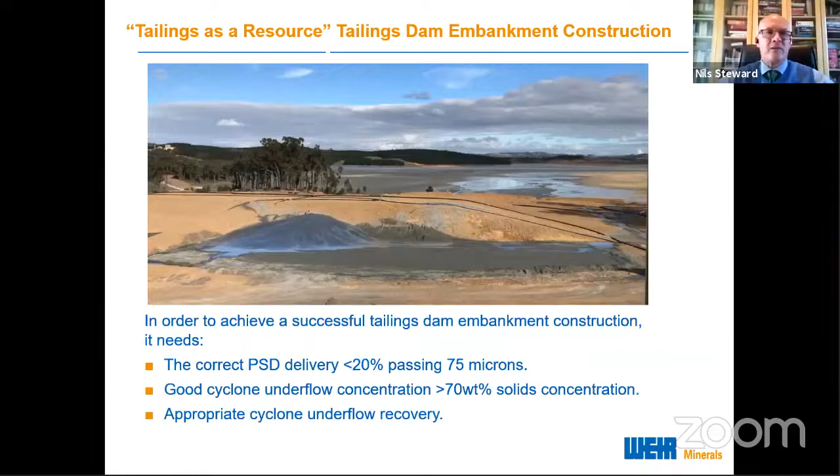In this instance, we achieved our 20% passing 75 microns. This gives you an idea of what the product looks like when it's pumped. If you look at the right-hand picture, you can see the granularity and coarseness of the product as it's being moved around by a bobcat.

The product is delivered at 74 weight percent solids concentration, and we're recovering around 45% of the total tailings, which is more than enough to build the tailings dam embankment.

At the bottom here, whilst we haven't done a lot of work in this area, you'll note that this secondary cyclone underflow and pulp, centrifuge pulp, combined pulp, when deposited on site in situ, has again desiccated and formed this hard crust, which I've got samples of in our laboratory that we're keeping an eye on. So we're doing in situ very much what we've actually done in the laboratory, which suggests that as a tailings storage methodology, TerraFlowing can also meet that, besides giving you the opportunity of investigating tailings as a resource within your organization.

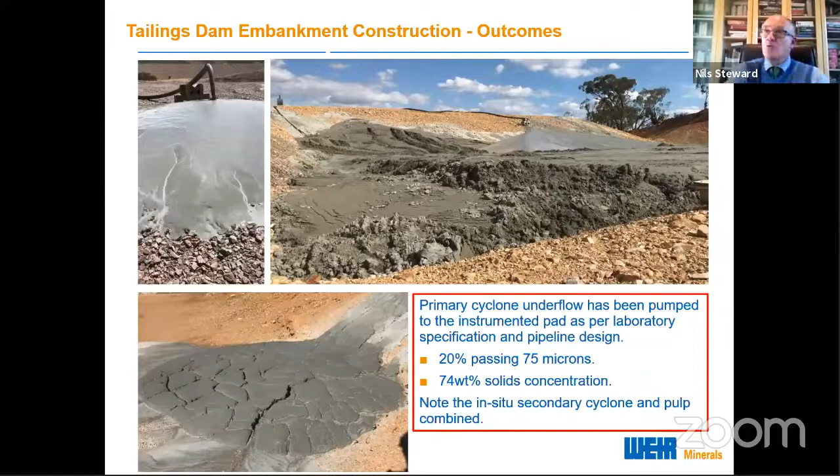So what are the benefits of TerraFlowing? One, definitely water recovery. Two, tailings as a value proposition, having a look at what else you can do because you have a different particle size distribution capability. Improved safety in your tailings dam.

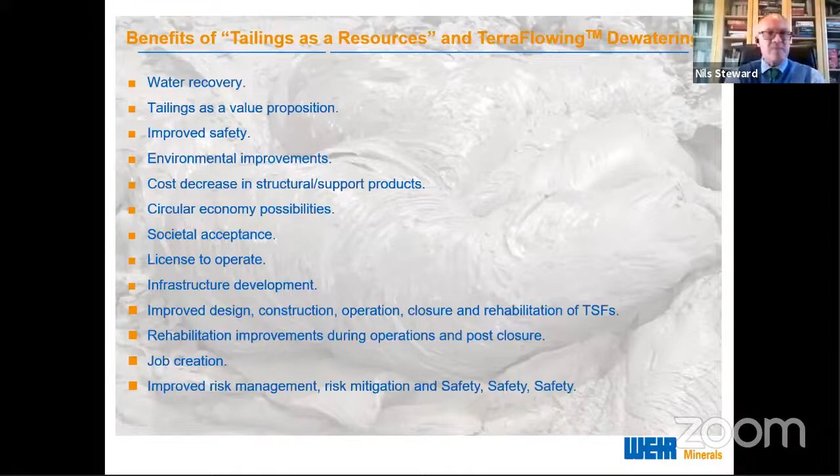Sand tailings dams have proven extremely successful in seismic areas in South America. There is no doubt that they have withstood very high seismicity. All of this is well documented.

Environmental improvements - we get to recover more water. And if we're correct, and so far we've repeated what we've done in the laboratory with the secondary cyclone underflow and centrifuge pulp, we produce a hard, dust-free surface - a tailings dam with no dust. There's a significant saving and improvement on the environment there.

If we look at tailings as a resource on a small scale, just for the mine operation - mine roads, whether those are haulage roads, underground roads, or local community roads. If we look at the decreasing cost of shotcrete and underground support in those areas - just because I've mentioned concrete roads and shotcrete does not deny the fact of roof bolt grouts. So there are lots of circular economy possibilities here.

The societal acceptance possibilities of being able to uplift local societies, which gives one a license to operate. Infrastructure development, as we've discussed, roads. Improved design, construction, operation, closure, and rehabilitation of TSFs because of the stable nature of the structure, and because we actually are putting a dewatered product into the tailings storage facility. Rehabilitation improvement opportunities during operation, looking at being able to close out a tailings dam whilst you're actually operating.